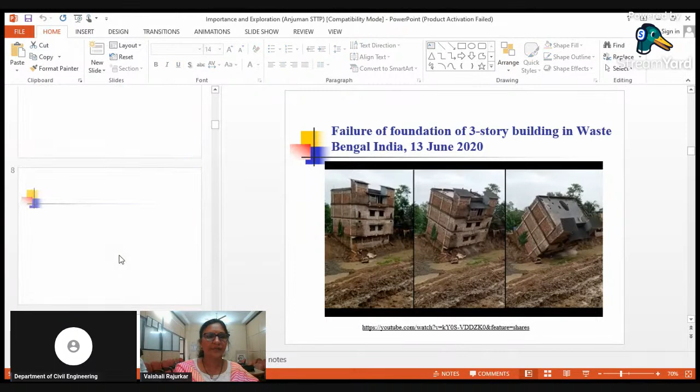Good afternoon, everyone. Today we will discuss the importance of geotechnical exploration in infrastructure development. We all know that in developing countries like India, the infrastructure industry is growing at a very fast rate. But geotechnical exploration is equally important for construction and infrastructure development, so that constructions are made in a proper manner.

The structural design is made good, and the material used for the construction is very good. But if the soil supporting the structure is not in good condition, then naturally there is a failure of the structure. So we know some examples of geotechnical exploration where proper investigation and proper construction care was not taken, and a disaster took place.

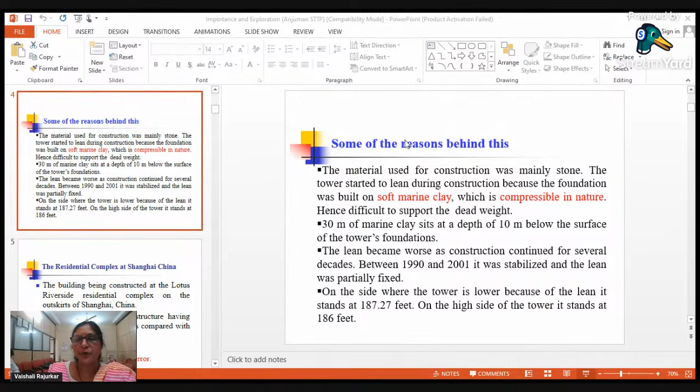Some of the basic reasons behind this: the material used for construction was mainly stone. The tower started to lean during construction because the foundation was built on soft marine clay, which is compressible in nature and hence difficult to support the dead weight.

A 30-meter layer of marine clay was available 10 meters below the surface of the tower, and it took around 200 years for its completion. For rectification also, the tower was closed for around 10 years for rectification measures.

Now the third example is a recent one. China is a developing country where all proper care before construction is generally taken. We can discuss one building constructed in Shanghai, China, at the riverside. The building was slender in structure, having a cross-sectional area less as compared to its height, and it collapsed in the month of June 2009.

One of the other very important things to keep in mind is water. Water is an enemy of the geotechnical engineer, or an enemy of soil. When there is entry of moisture, the strength of the soil reduces by 50%. Therefore, most failures take place during the monsoon only. Here the failure took place in June, and it was due to human error.

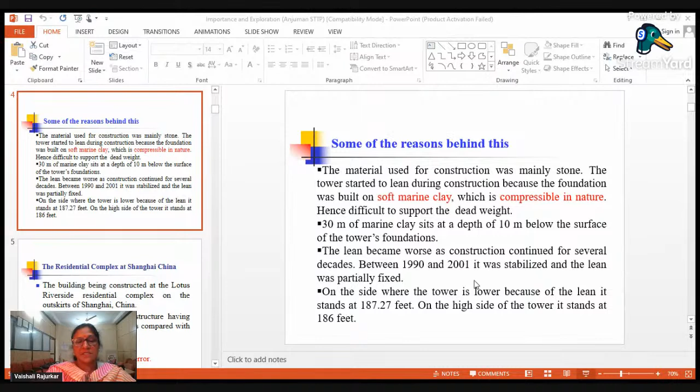It may be up to 20 meters, it may be up to 25 meters. There are different methods of boring, and these methods are changed according to the soil conditions available at the site. The first method of boring is auger boring.

Auger boring is the simplest method of exploration or sampling where power driven or hand operated augers can be used. Augers are used up to a maximum depth of 10 meters, and it is suitable only for soft soils, either without a water table, or with a water table, in which case casing is suggested to be provided.

Then, if the soil becomes harder or stiff, in that case the wash boring method can be used.

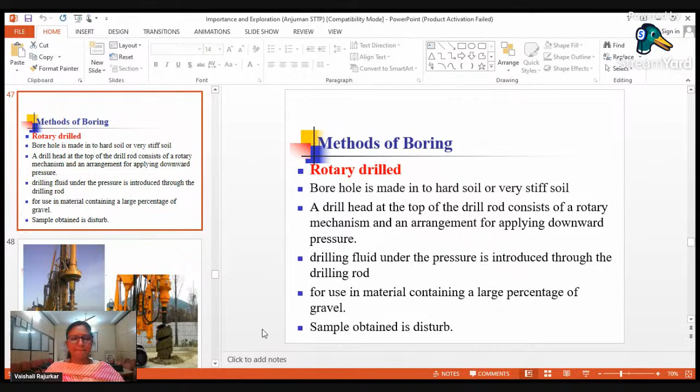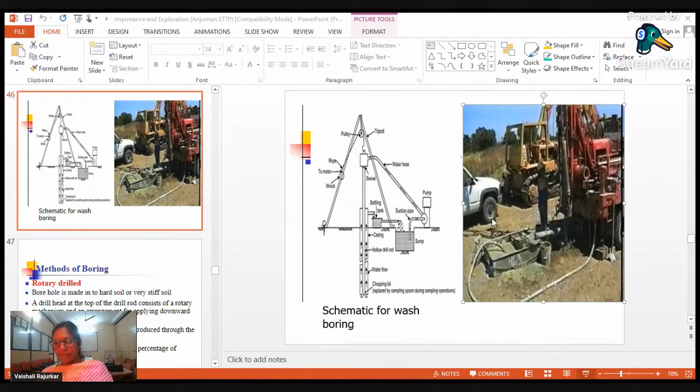Now suppose the soil is in a very hard condition. In that case, the previous method, auger boring, is not suitable. Secondly, we cannot go for wash boring either. In that case, rotary drilling comes into the picture.

So the borehole is made into the hard or very stiff soil. A drill head at the top of the drill rod consists of a rotary mechanism and an arrangement for applying downward pressure. You can see this is the rotary mechanism.

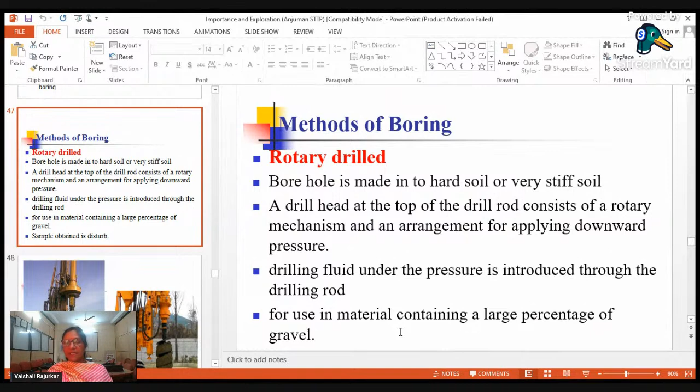Here you can see this is the soil which is cut. The soil is fixed into the blades of the auger, which is further removed. So this is called the rotary mechanism. So this rotary mechanism is used. Drilling fluid under pressure is introduced through the drilling rod for use in material containing a large percentage of gravel. Then the fourth method is percussion drilling.

If the soil is in a very hard condition or the soil is containing some rocks, in that case all the three methods cannot be suitable. In that case, we will go for percussion drilling. Here in percussion drilling, heavy chisels are attached at the bottom of the rod. Here suppose this is the tripod and these are the heavy chisels which are placed at the bottom.

Then there is continuous lifting and dropping of the material. Here you can see these are the heavy chisels which are lifting and dropping, which pulverize the rock over here. Then water is added from the top, and it is converted into slurry. Then whatever slurry is created over here is collected and lifted by the sand pump. So this is the method called percussion drilling.

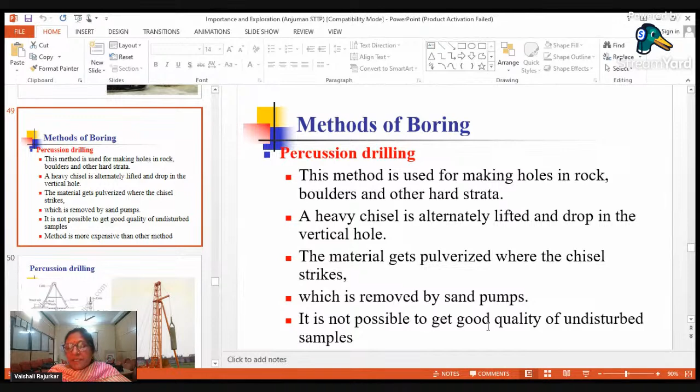So the percussion drilling method is mostly suitable for rock. This method is used for making holes into rock, boulders and other hard strata. A heavy chisel is alternately lifted and dropped in the vertical hole. The material gets pulverized where the chisel strikes, which is removed with the help of a sand pump, and it is not possible to get a quality undisturbed sample. So this is percussion drilling.

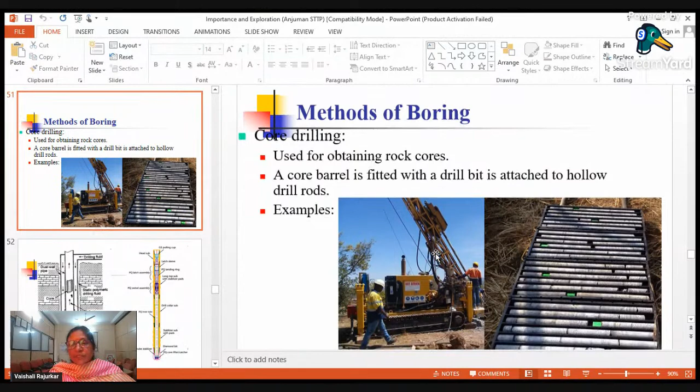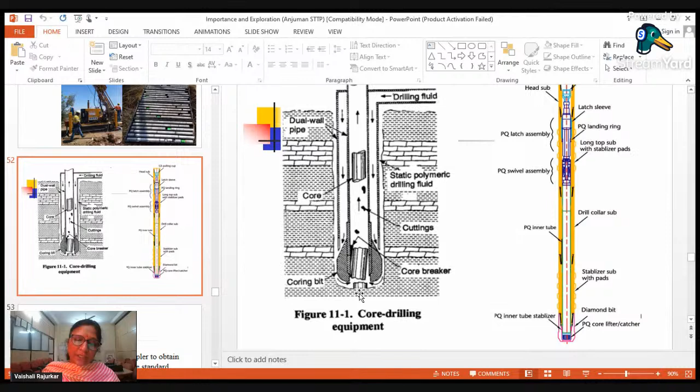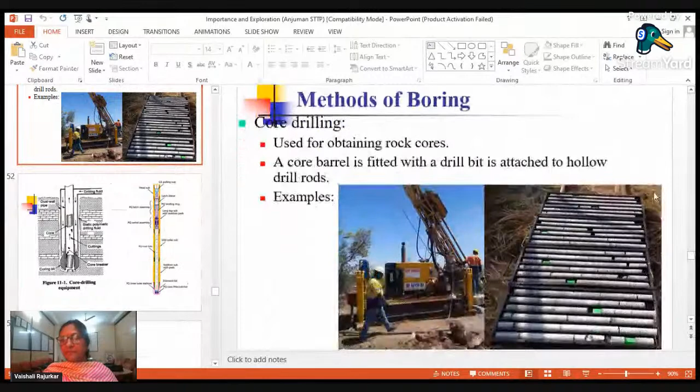So this type of core enters, and once the samples are collected, you can see this is the sampling method. These are the samples which are collected at different levels. Suppose the rock is obtained at 3 meter depth. It will be started from 3 to 4 meter, then 4 to 5 meter, then 5 to 6 meter, 6 to 7 meter. Like this it is placed into different cases.

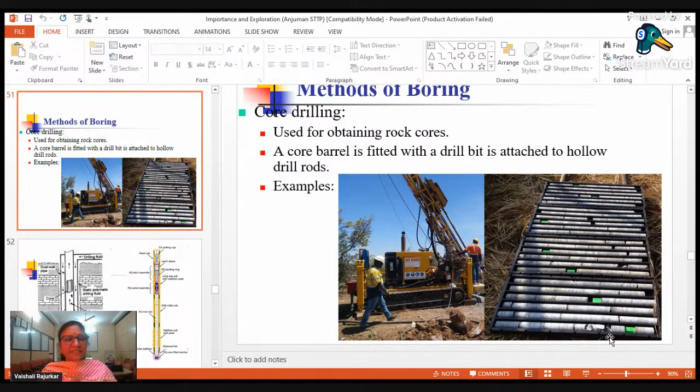And here, as per the depth, the markings are made. Suppose in this green area the rock core is not obtained properly. If it is in slurry form, a line will be placed, or if it is obtained in gravelly form, then that gravel is placed and the distance is mentioned over here. Okay.

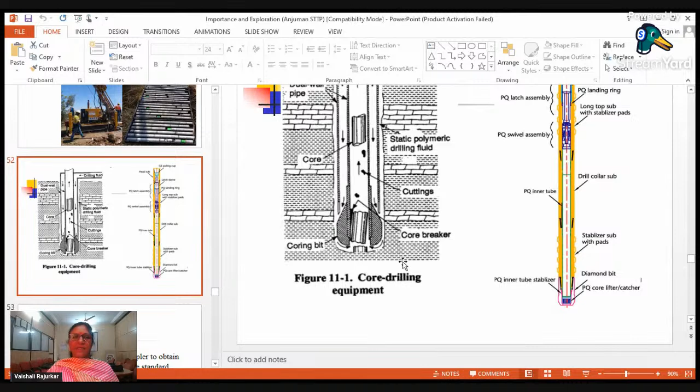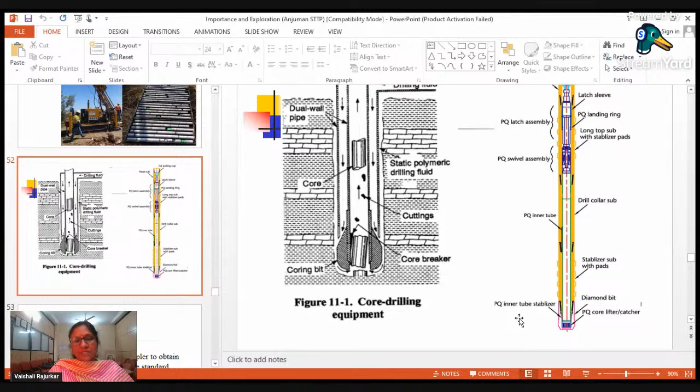So here we can see there are boreholes. This is the borehole. Now, what exactly is the purpose of boring? Boring is carried out to take soil samples at different levels. Suppose I want to take out soil samples at different depths, at 1.5 meter, then 3 meter, then 4.5 meter, 6 meter, 7.5 meter. Like that, the soil samples are taken.

So if I want the soil sample at 3 meter depth, what will I do? I'll make a borehole up to a depth of 3 meters. Then I will remove the drilling bits, attach the sampler at the bottom, and by giving pressure, the soil enters into the sampler. Once it is filled with soil, it is lifted up, removed, and the borehole is continued further.

Like that, at different stages, we will take out the soil sample from the borehole while making the borehole itself. Just by driving the borehole, the samples are taken at different levels. First, make the hole up to a depth of 1.5 meter and take out the sample. Then make the borehole to 3 meter depth, and at 3 meter you take the sample.

Then again, we are taking out the soil sample at every 1.5 meter interval, or where there is a change in the strata, whichever is less. Suppose I have taken the soil sample at 3 meter depth, and immediately at 4 meter depth there is a change in the strata; I will take the soil sample at 4 meter also, right? After that 4 meter, again after 1.5 meter, I will take one more soil sample. So like that, the soil samples are taken out.

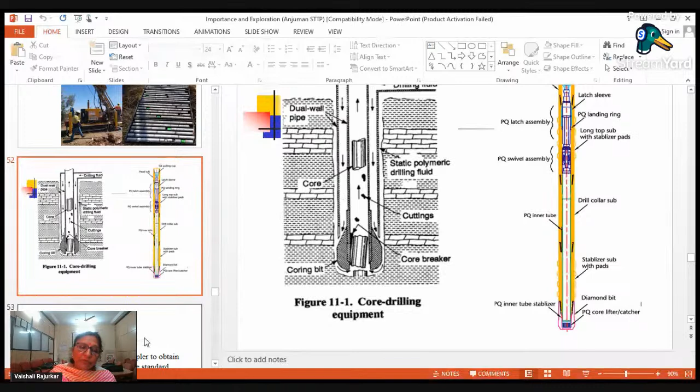Again, whatever soil samples we are taking out, it will depend upon the type of sampler that you are using during the sampling. So now, the different types of samplers that we use to take out the sample, we will discuss now. The first one is the split spoon sampler. This is the most commonly used type of sampler. It is just to get a disturbed sample when there is no liner.

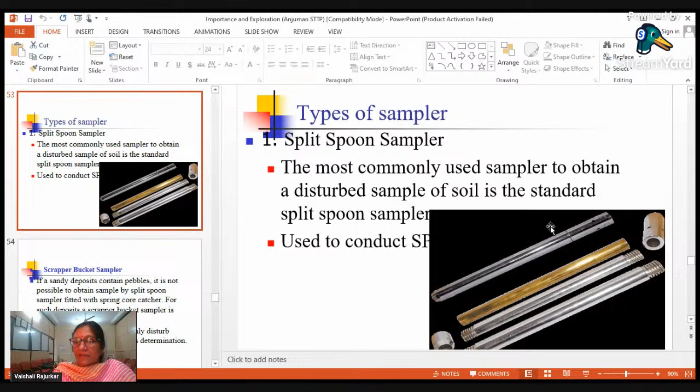You can see this is the sampler which has a cutting shoe at the bottom, which is 7.5 centimeter. This is attached over here. Then this is the coupling. This coupling is 15 centimeter length, and it is at the top, and the sampler is at the middle. You can see this is the sampler which is split up into two parts.

When such a sampler is used with the liner, you can see this is the liner which is inside the sampling tube. When it is carrying a liner, it will give you a proper quality of undisturbed sample. When it is used without a liner, it will give you a disturbed quality of sample. And generally, this type of sampler is used to carry out the standard penetration test.

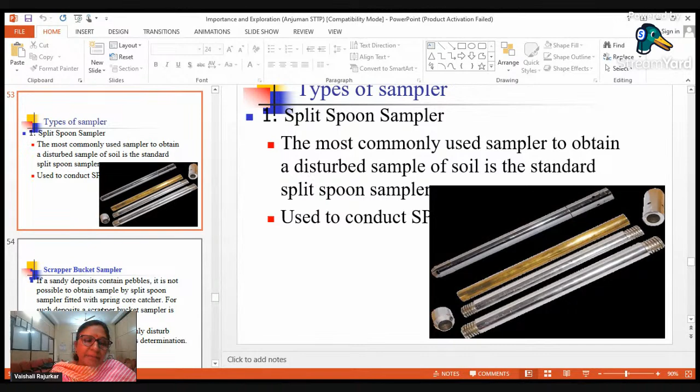Then the second type of sampler is called the scraper bucket sampler. The scraper bucket sampler is used if the soil contains gravels or pebbles. In such cases, the above sampler cannot be used. Sometimes during the driving, some pebble or gravel may come into it and block the way. So in that case, we will use the scraper bucket sampler. If the sandy deposit contains pebbles, it is not possible to obtain a sample by split spoon sampler, so we go for the scraper bucket sampler.

Here you can see the scraper bucket sampler, which is attached to the drilling rod at its top and the driving shoe at the bottom. Here you can see the driving point. That driving point is placed at the bottom of the borehole, and we rotate it. There is a vertical slit available over the sampling tube, and we rotate it opposite to the direction. While rotating, it will scrape the surrounding material, and that scraped material enters through this slit into the bucket.

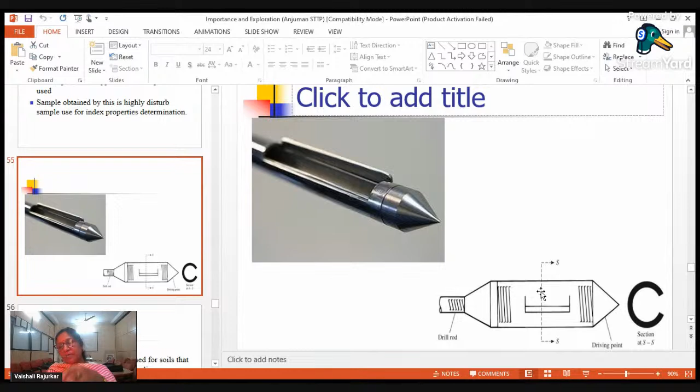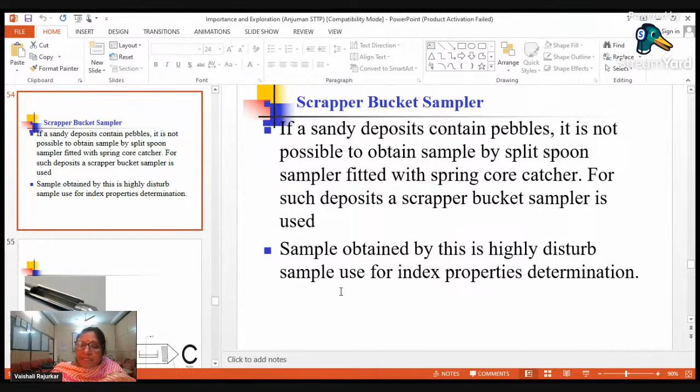This is called the bucket. Through this slit, the scraped material enters into the bucket. Once the bucket is filled, it will be removed, cleaned, the soil sample removed, and again put into the drilling hole. So this is called the scraper bucket sampler, used when the soil contains pebbles or gravel and we cannot use the split spoon sampler. The sample obtained is highly disturbed and used just to determine the index properties of the soil.

Then the third type of sampler is called the thin wall open tube sampler. It is also called the Shelby tube sampler, which is used for soils that are particularly sensitive to sampling. Generally, samples in soft cohesive soils are taken with the thin wall samplers only. These give very sensitive samples, where the degree of disturbance is very less.

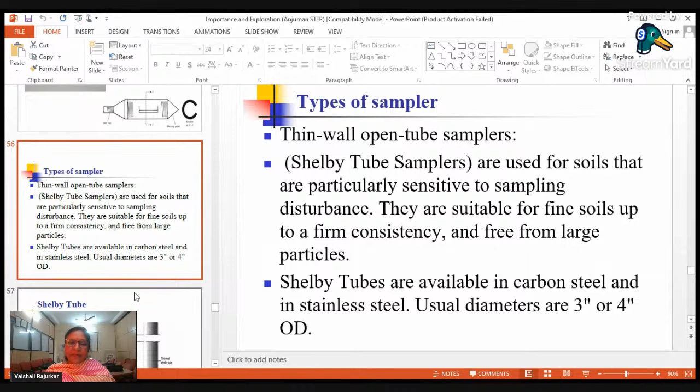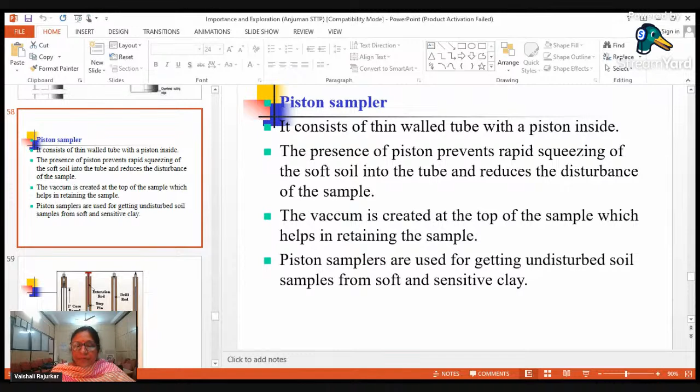Whatever soil samples we obtain, they are completely in an intact state, and we will obtain a proper undisturbed quality of sample through this. Then the fourth type of sampler is the piston sampler. The piston sampler is mostly suited for taking out soil samples which are very sensitive or very soft; these soils are taken with the help of a piston.

So here you can see the arrangement where the piston is attached at the bottom of the sampler. This is the complete sampler, and this is the rod; at the bottom of the rod there is a piston. Here you can see the liner of the sampler, where we will insert the sampler with the piston into the soil by hammering.

Once the sampler is completely inserted into the soil, only the piston is lifted up. The sampler stays here itself, only the piston is lifted. During the lifting of the piston, by the suction action, the air above the sample will try to keep the soil in an intact state.

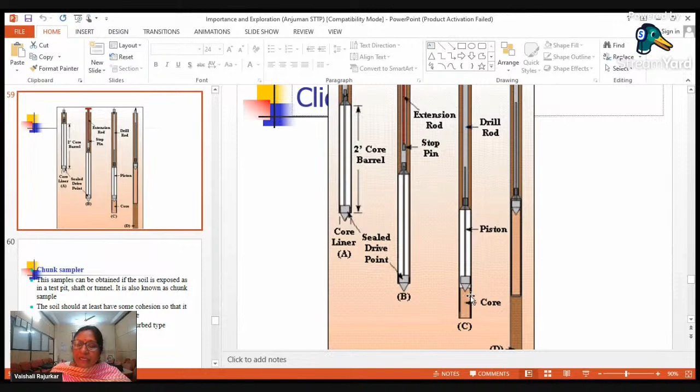While squeezing, a vacuum is created over here, which will help to retain the soil sample in an intact state. So this is similar to a pump. While taking out the piston, the vacuum is created by the squeezing action, and that vacuum will help to retain the soil sample in an intact state. So this is called a piston sampler.

It consists of a thin wall tube with the piston inside. The presence of the piston prevents rapid squeezing of the soft soil into the tube and reduces the disturbance of the sample. The vacuum created by the squeezing action helps to retain the soil sample in an intact state. So this is the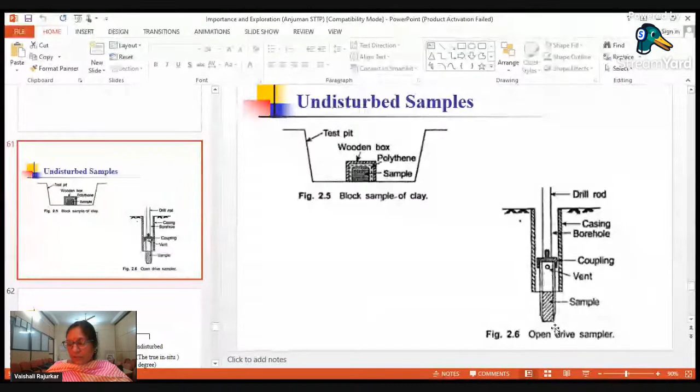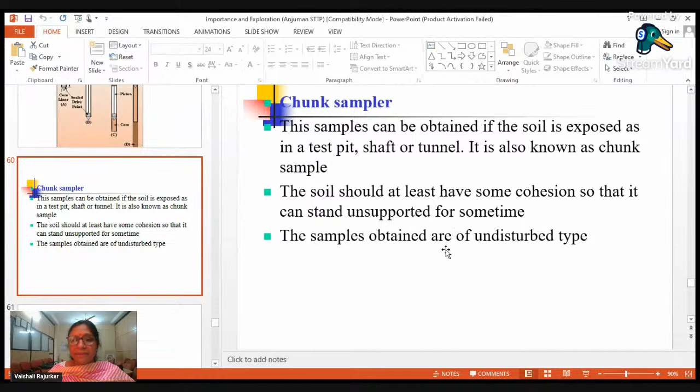This is the open drive sample. This is possible in a borehole where a bigger size sampler is inserted into the soil to take the undisturbed sample. This can be obtained if the soil is exposed as in a test pit, shaft or tunnel. It is known as a chunk sample. The soil should at least have some cohesion so that it can stand unsupported for some time, and the samples obtained are in an undisturbed condition.

Then, how many samplers have we discussed? One is the split spoon sampler, second is the scraper bucket, third is the open tube sampler, fourth is the piston sampler, and fifth is the chunk sampler. Out of these five, some samplers give disturbed samples and some give undisturbed samples. So whatever samples we have obtained are broadly divided into two types, that is disturbed samples and undisturbed samples.

Now, what is a disturbed sample? Disturbed samples are further divided into two, that is remolded soil samples or representative soil samples. Suppose the soil we obtained from the scraper bucket sampler is completely in a disturbed condition. We will place that disturbed sample into a sampler and remold it. Then it will be in a remolded condition, while it is representative. Another type is not representative, meaning it will not show you proper soil properties.

Suppose the samples we get from wash boring come in slurry form and are mixed. In that case, it will not represent any of the soil, and it will be called non-representative. Some samples, even though in a disturbed condition, show some properties; that is representative. Then what is UDS, that is undisturbed sample? It is a true in situ sample which is obtained from a chunk or block. So these are the types of samples.

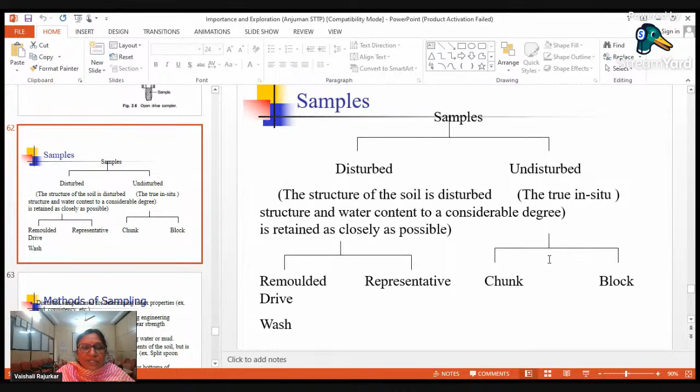Disturbed samples are used for determining index properties, whereas undisturbed samples are used for shear strength, permeability, and compressibility, meaning engineering properties of soil. Here, undisturbed samples are used to determine engineering properties, that is density, water content, shear strength, and wash samples are obtained from wash boring in the form of mud.

Then representative samples retain all constituents of soil but are disturbed from their natural state and structure, where the split spoon sampler may be used. Then block samples or chunk samples are taken from open excavation, sealed, and used to carry out engineering tests.

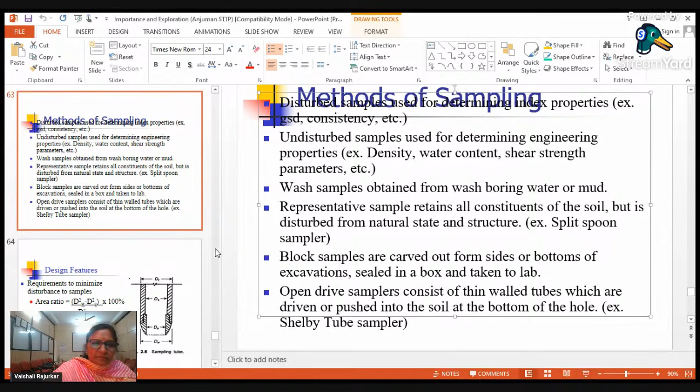Then whatever samplers we are using should have some specification, and that is called design features. So the design features consist of area ratio, inside clearance, outside clearance, and the recovery ratio. These are some of the things.

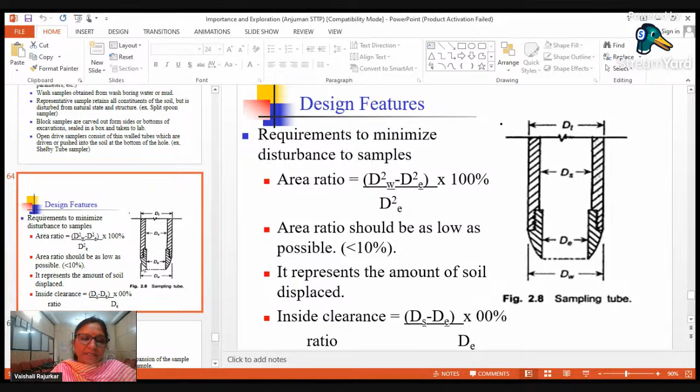So area ratio is the ratio of outer diameter minus internal diameter divided by internal diameter, into 100. Its numerical value should be less than 10%; then it will give you a better, good quality undisturbed sample.

Whatever methods we have discussed earlier, all those methods are useful for getting the soil sample. Now, after the soil sample, there is a rock core. When we are considering rock core, there is a recovery ratio, and RQD is the most important parameter that we have to check just to know the quality of rock. The recovery ratio is the length of sample recovered to the length of run.

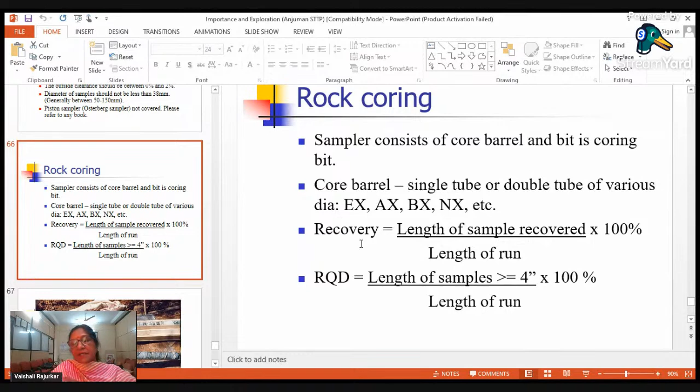Suppose the length of the run is 1 meter, and we obtain a single piece of, suppose, 10 centimeters. So 10 divided by 100 means only a 10% recovery ratio. In that case, that sample may not give you a good representation of a particular source. Therefore, the recovery ratio should be more than 90%. In that case, it will give you a better result.

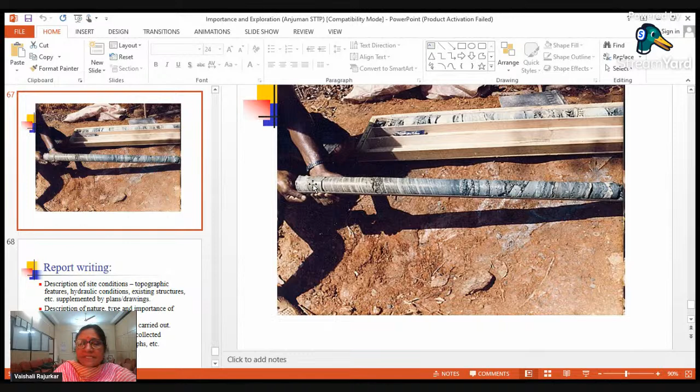Here you can see this is the small sample where the run length is 1 meter. Suppose this is the 10-meter depth. Here the recovery ratio is 10%, whereas this is the complete intact rock core. Here the recovery ratio is 90%. In that case, we will just discard this sample and go for this sample because it has a good recovery ratio.

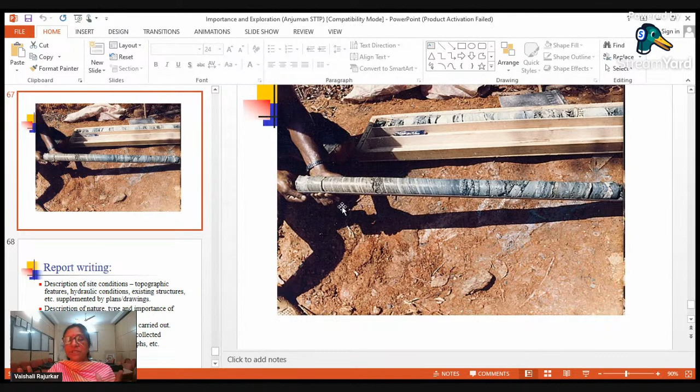So after making the borehole and taking out the samples at different stages, we send all those samples to the laboratory for investigation. Once we collect all the data from the primary investigation, from the detailed investigation, from the SPT, or from the plate load test, we use all that data in a concise form, and that is called the report.

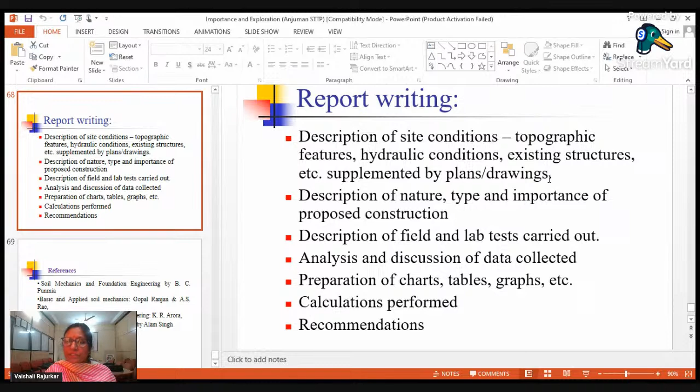That report represents the description of the site condition, means the topographical features of the soil condition: at which depth there is a soft layer, at what depth there is murum, at what depth there is a compressible layer, at what depth hard strata is available, what its strength is, and where the water table lies. All these things are collected from different boreholes and different samples, and all that data is put into a concise form, called a geotechnical investigation report.

So description of site condition, topographic features, hydraulic condition, existing structures, supplemented by plans and drawings; all that data is represented in a concise form, which is important for the proposed construction. Description of field and lab tests carried out, analysis and discussion of data collected, preparation of charts, tables and graphs, and calculations performed. And lastly, from whatever data is obtained, the recommendations are given in the concise report.

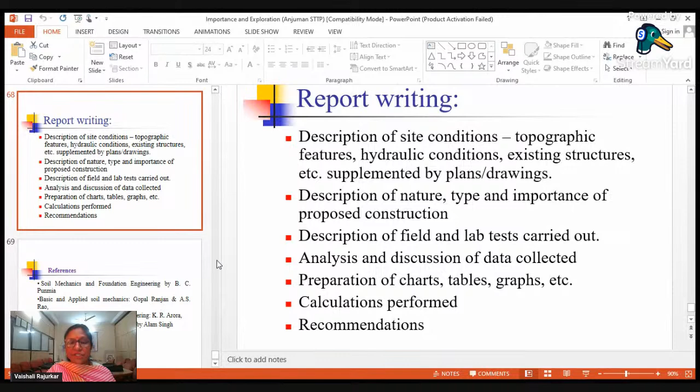All the test data is given in that concise report, and lastly, the recommendations are given. Suppose, as per the recommendation, at 5 meter depth there is hard rock available. Here you can go for the open foundation, or you can go for the isolated footing. These recommendations are given by the geotechnical expert. Once this recommendation is given, the whole report is sent to the structural designer to carry out further design. So this is the complete thing.

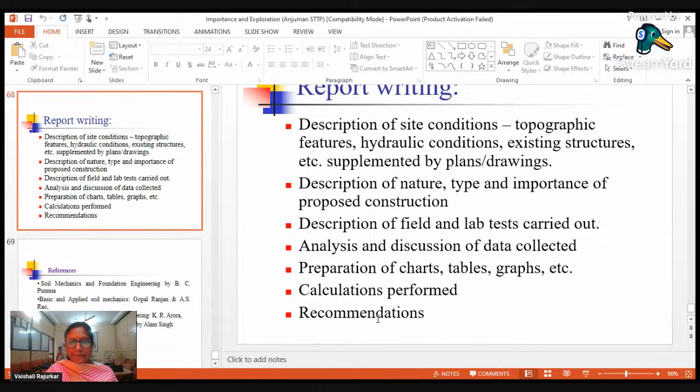So these are the references.